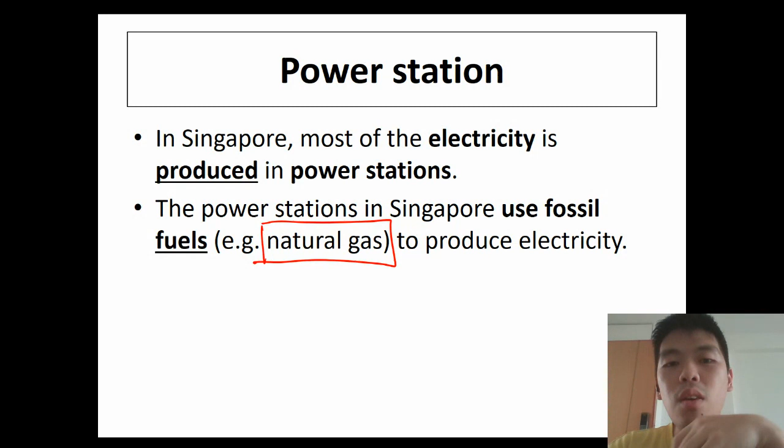The power stations in Singapore use fossil fuels, specifically natural gas. Why natural gas? Because it's one of the most efficient, as we studied last time, and it is easy to transport to Singapore. We get it from a lot of countries. This is one example, the Senoko power station at Sembawang.

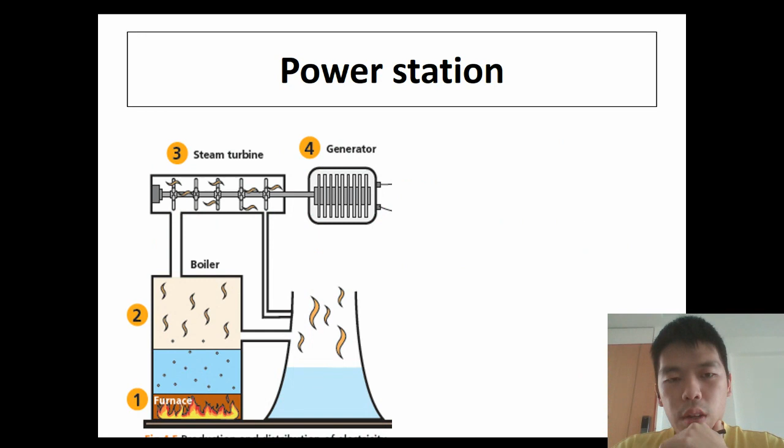It looks like this, where we can remove waste gas or other materials through these long chimney pipes. A power station has four parts. Let's go through these four parts together. How does the power station actually produce electricity? We have done this before, so this is also a recap.

Number one, let's focus on this part: the furnace. This is what we call a furnace. The fossil fuels are burned here. You put in the fossil fuels and let them burn. What happens? It produces heat.

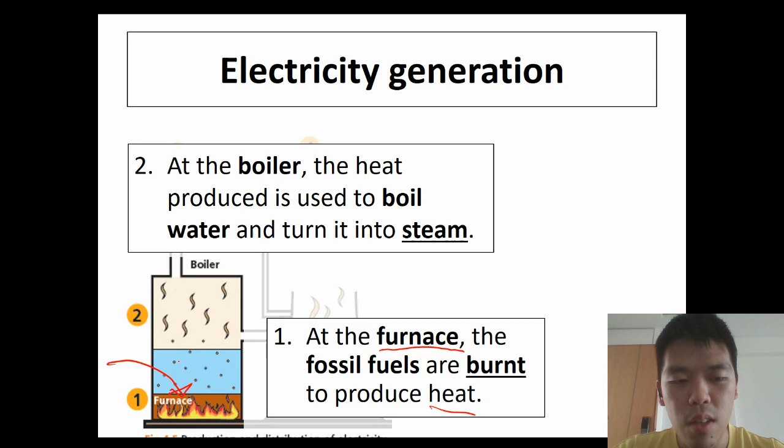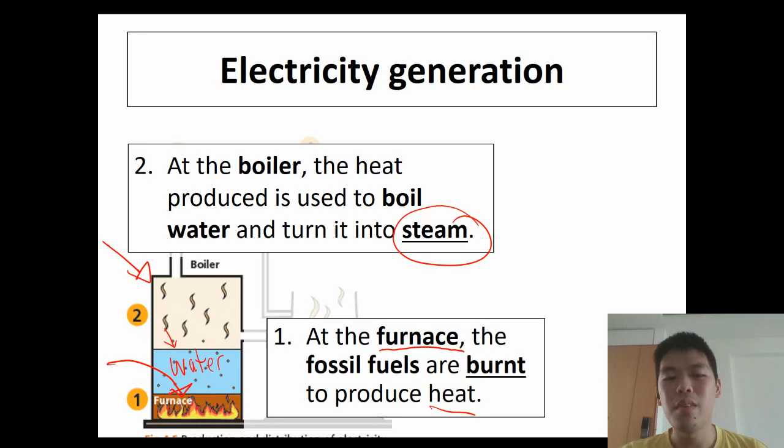So now heat is produced. When heat is produced, what happens? You see here there is water. This whole thing is called a boiler. The heat produced from burning the fossil fuels is used to boil the water here. This water will boil and change into steam. The steam will rise up.

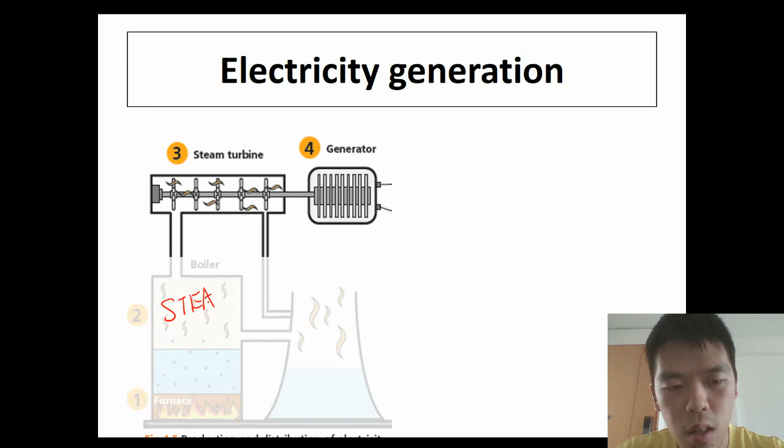Very good, let's look at the next part. Steam is produced, remember steam is here. Steam rises up - what happens? It goes on to turn the steam turbine. So we go on to the next part, the steam turbine. We went from the furnace, from the boiler, into the steam turbine.

In this steam turbine, it turns - all these things will turn. The steam turbine then turns the generator. This is the generator here that produces the electricity. Remember in the previous chapter, we talked about the magnet inside this generator. This magnet will spin and produce electricity, using our hand crank that we used last time, where we turn it with our hand and it produces electricity. Remember, this is the same function.

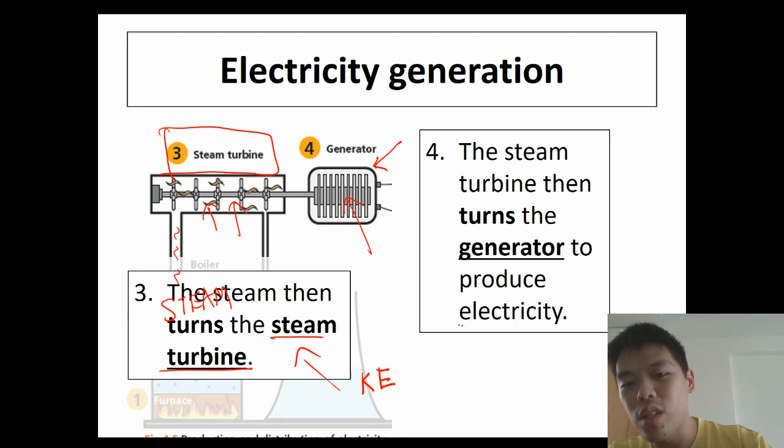So the steam goes in, turns the steam turbine. When it turns, it has kinetic energy. This steam turbine then turns the generator, and the generator produces electricity. This generator, when it turns, also has kinetic energy, which is then converted to give electrical energy.

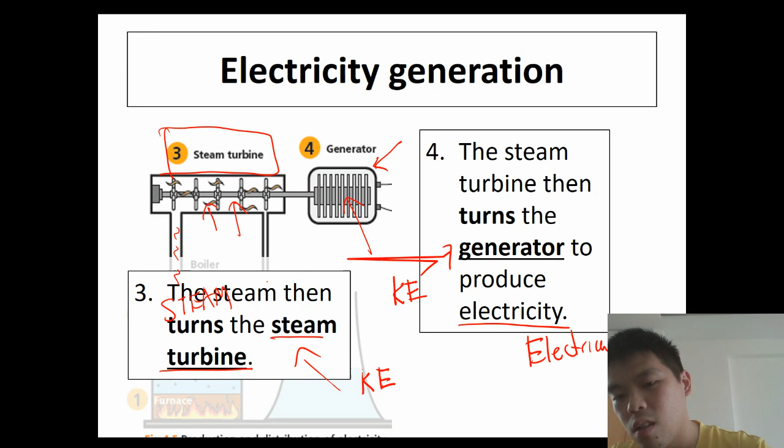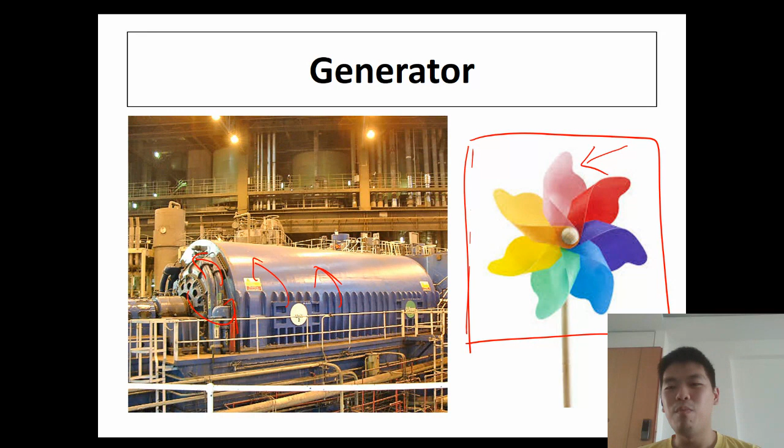So let's run through this again - how does the steam actually move? Energy produced from the furnace heats up the water, and steam is produced. So let's draw the arrow.

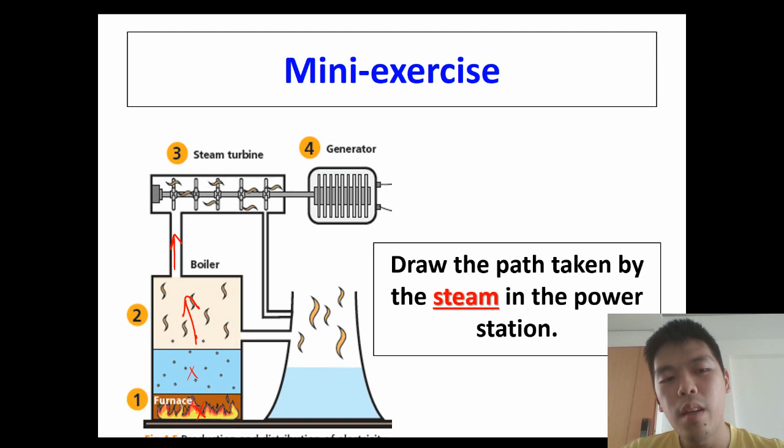Steam goes up here from the boiler and is channeled into the steam turbine. The steam turbine will spin, this turbine will spin, and then once it reaches here, it will condense, move through here, condense even more, and then goes back into the collection point.

Okay, so this is how the steam is used. Once it's used again, the water can channel back in, and then it recycles in a closed loop.

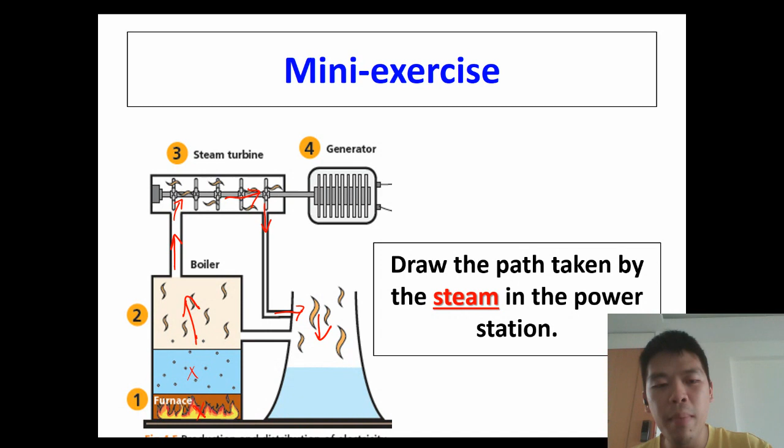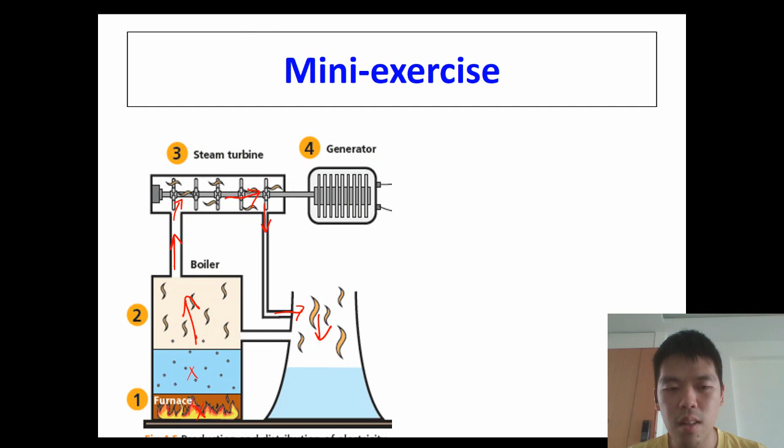Okay, so what is the energy conversion? At the furnace, where is the furnace? Let's recap again. Where's the furnace? The furnace is here, okay.

So at the furnace, your fossil fuels have chemical, remember, potential energy. This chemical potential energy is then converted into heat energy because the fossil fuel produces heat.

Then it goes into the boiler. In the boiler itself, the heat from this fossil fuel is then used to boil the water and change it into steam. So that's why when this steam is there, it has kinetic energy.

Then this kinetic energy of the steam will be used to turn the turbine. So where are we now? We are now in the turbine.

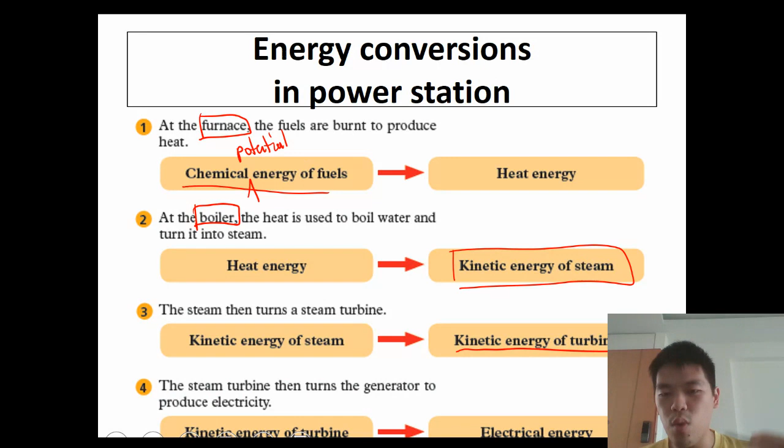The turbine will spin, that's why it has kinetic energy, followed by going into the kinetic energy to produce electrical energy, and this is in the generator. So in the generator, the kinetic energy of the turbine will be changed into electrical energy.

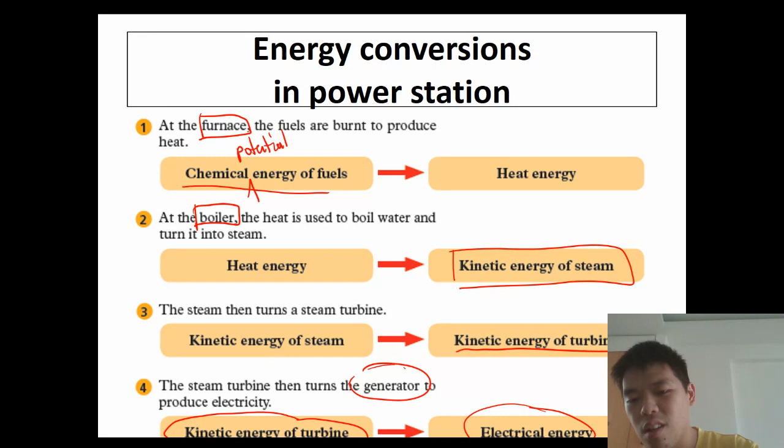Okay. So what happens after that? That is in your power station.

Besides the power station, what other things can produce electricity? One, we have batteries, or what we call dry cells. Second, we have also your phone battery. It is rechargeable. Not all batteries are rechargeable. Why is this good? Because we can use it on the move, which means that it is portable for use.

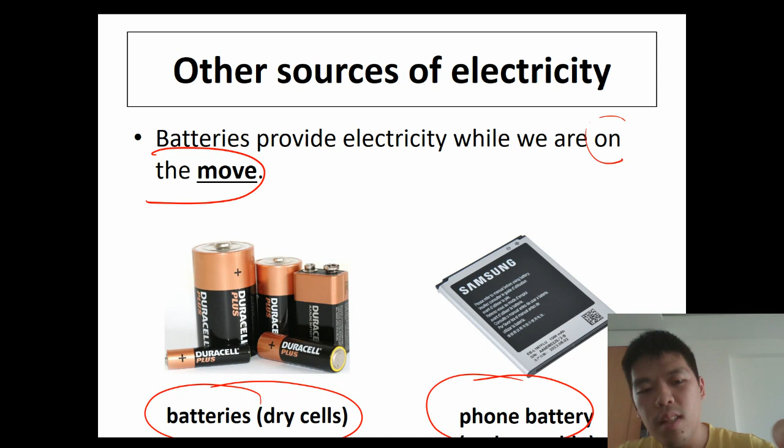Okay, so what is the energy conversion that takes place when you use a battery? Good. In your battery, you have chemicals inside, so it stores all energy as chemical potential energy.

When you put it into your toys, you put it into your laptop, so what will happen? Electrical energy will come out. So it changed from chemical potential into electrical.

Good. Now what happens if you are now charging it? What if I'm charging? You connect your charger to the mains, right? So what comes out from your main switch? Electricity. So electrical energy will then be moved into your battery, and then it will store as chemical potential energy.

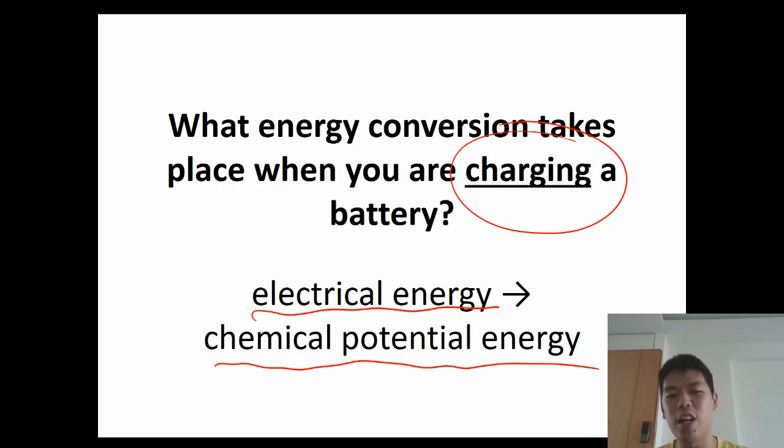So this chemical potential energy itself will be stored in your batteries, and it can be recharged. Okay, what other sources are there?

Remember, we can have solar energy. So solar panels can convert light energy from the sun to electrical energy. At the same time, this is a renewable source of energy. Recap, renewable source of energy.

So what energy conversion takes place in the solar panel? Light energy will be converted straight into electrical energy. This is for your solar panel. So with here, we will end off for this chapter, and let's do some practice, right?